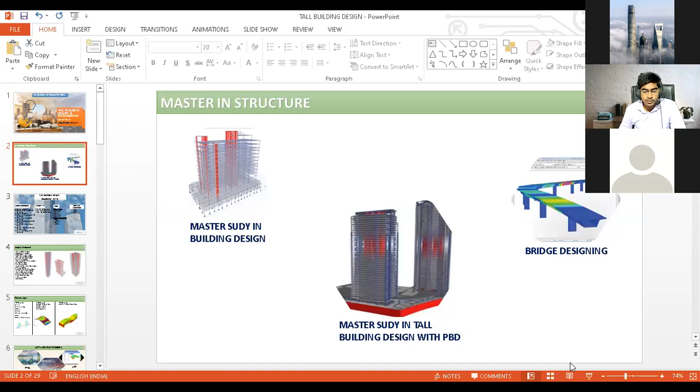Actually, we are running... But I told you that basic knowledge of structures is compulsory before learning tall building design. You have the basic knowledge of it, no? I think I have basic knowledge regarding structural designs. Okay, then it's okay, because it's a completely advanced concept we will talk about here. So you have to keep your basic knowledge beside all the advanced topics. I would like to explain all the advanced things here, and within 1 hour you will be up to the level where you at least know what tall building design is and how we can pursue the design.

So what is your comfortable language? Hindi or English or both? English. Actually, I don't understand Hindi. Okay, no problem. That is not an issue. I will explain completely in English only.

One thing: we are running master in structure courses, and we have three courses here: master study in building design, master study in tall building design, and bridge design. First, master study in building design covers up to G plus 10 structures only. All the analysis we perform there is up to G plus 10, not more than G plus 10. When you go above G plus 10, to G plus 30, G plus 40, we cover it in another course, tall building with PBD, performance-based design. And we have bridge design. These are the courses we are running.

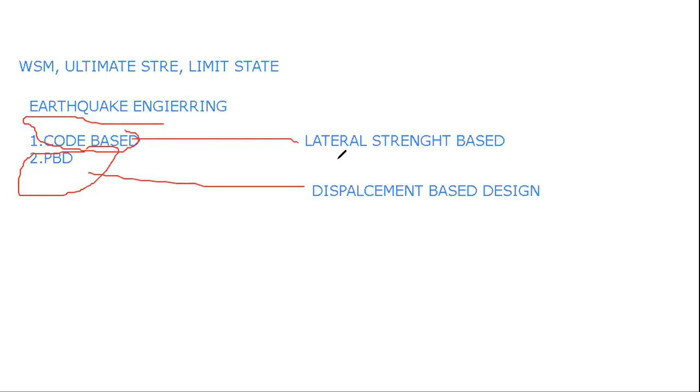But we have to understand what is the actual difference between code-based design and PBD-based design. This is the main difference. The lateral one we call a force-based design, and PBD is like a displacement-based design. So this is the actual difference between them.

Another thing we have to see is the force control. We have different types of elements. Suppose shear walls are there, beams are there, columns are there. So we have to categorize which elements will go more into non-linear behavior, we can say more inelastic. We have to see that.

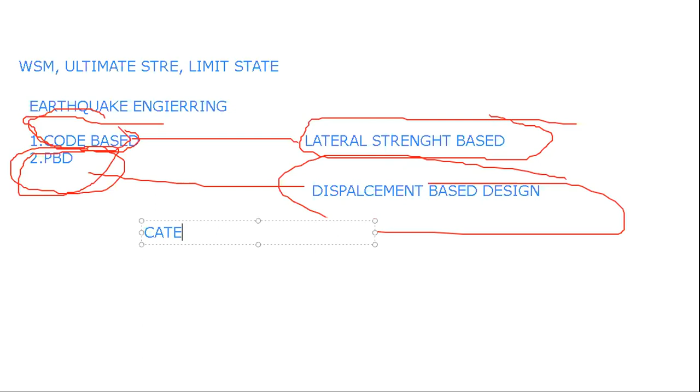We generally call it force control and deformation control. We have two categories. We have to categorize our elements into these two things, force-controlled or deformation-controlled. So why is there a need for categorizing?

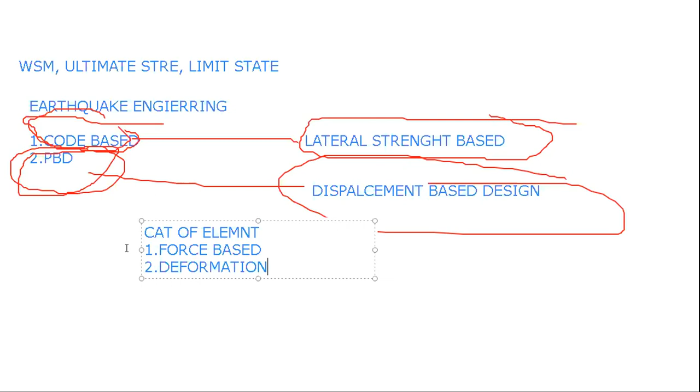We have to categorize for one reason only: some elements, like beams, will not go that much inelastic, but the shear wall will go more inelastic. So we have to make the shear wall more deformation-controlled. We will talk about it later when we go deep into PBD. So actually you have to understand it.

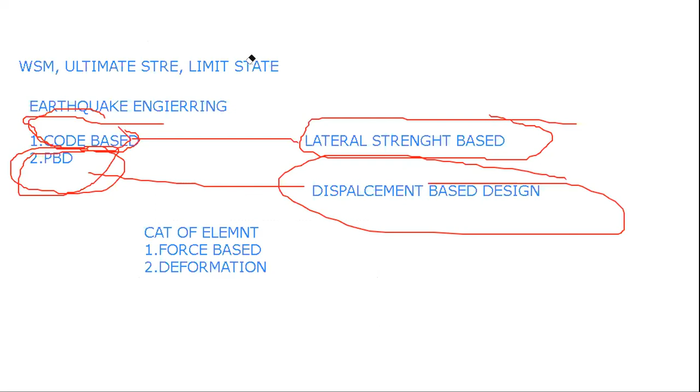The design evolution has been done: working stress, ultimate stress, and limit state. In earthquake design also there has been an evolution: code-based and PBD-based. In these complete demo classes, I will explain more about PBD in the upcoming slides.

Again, come back to our basics, that is, the courses. We have bridge designing here. Bridge designing we generally do in Midas Civil. It's completely a bridge design software, and all the analysis is done in Midas Civil.

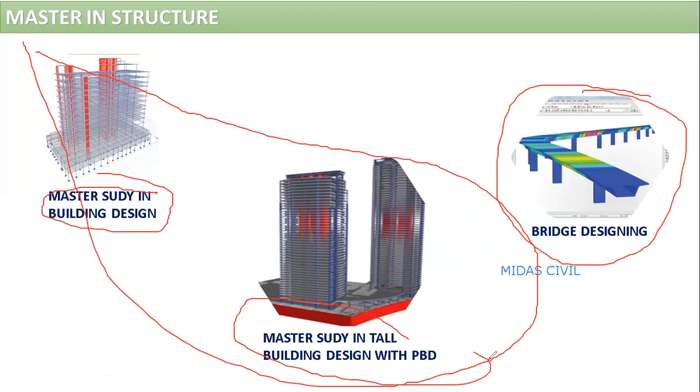In these demo classes I will talk about two things, only the building part: master study in building design and master study in tall building design. I will not cover any bridge designing. In this course, we will be highlighting the G+10 and the tall building.

Tall building also, because if you don't have any background knowledge, how can you learn tall building design? It's completely different. A G+10 building's behavior will be different. If you go above G+10, the building behavior is going to change. It's not going to be completely linear; we have to consider non-linear effects.

So only if you have the background knowledge of master study in building design, that is a simple G+10, can you proceed to tall building design. We also note in the courses that you should have at least a knowledge of G+10 structures to compare with tall building design.

Actually, I have knowledge about modeling in ETABS, reading the results and checking outputs regarding bending moments. That's the basic knowledge I have. Regarding manual calculations also, I have basic knowledge. Okay, no problem. But I will try to relate the two things, because I see you have experience also.

If you have 4-year experience in computer structure design, then I should start with tall building. But I told you I will cover two of them. Because I know that only output and results is not enough. If you see the coming slides, it is completely a next level of analysis. You will see. So I will cover both of things a little.

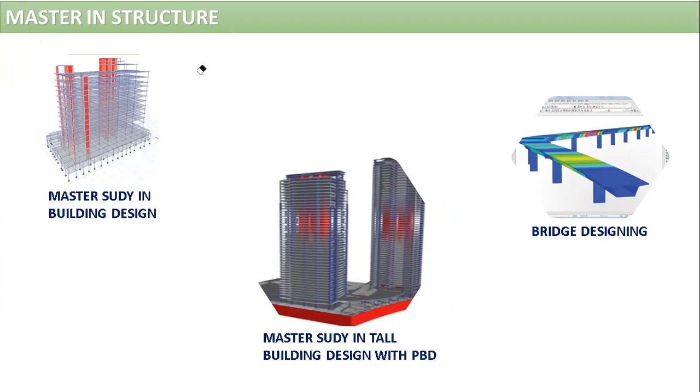So now we have to see the duration of the course of the tall building. Actually, the duration is 60 days, means 2 months. So in 2 months we are going to see all the parts here. You are going to completely study the design of the tall building, the structural dynamics of the tall building. Structural dynamics means you have complete knowledge of the dynamic behavior of the structures, means the modal behavior and all. It will come under this.

Structural system, you have the knowledge of the structural systems. Earthquake engineering. Wind engineering. So wind engineering also we are going to teach at an advanced level. That is the gust factor. You are going to study gust factor in this. Actually, we have different types here. I would like to show you.

See, wind engineering. In ETABS, we can apply wind through diaphragm extent, shell exposure, and through the gust factor. These three ways we have to apply the wind in the structures. The diaphragm extent is not that relevant, because if there is a tall building, gust application should be applied to that structure. So you're not going to study only the diaphragm extent and shell exposure. You're going to study the gust factor, and this very advanced level of analysis is there.

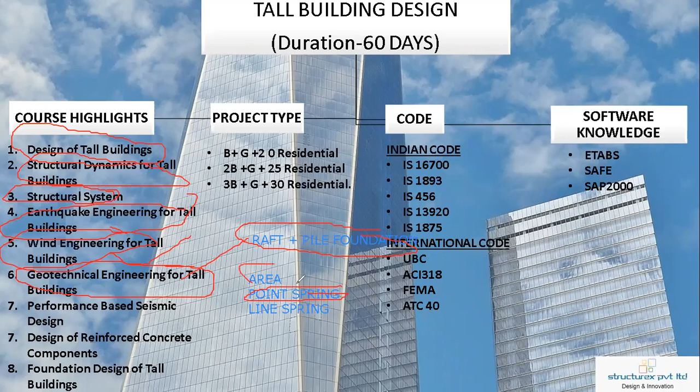But actually, in ETABS, we can't do design of foundation, right? I will come to that also. Area spring, line spring. There are different types of springs in the software. We can apply them through the stiffness properties. In the pile foundation we are going to study the point spring. If it is a pile plus raft, then area spring will also come. And suppose you have a pile foundation connected with a strap beam, then line spring is also included.

And we have performance based design, which I explained a little initially, and later on we will discuss it completely at an advanced level. Also design of concrete components, all the components here, the column, beam, shear wall, spandrel, and all will come here. And now we come to the foundation of the tall building design.

This foundation is done in the SAFE software. So here you are going to study the SAFE software also. A little bit I will discuss about SAFE software, what type of analysis you're going to perform in that.

Project type, you can see all the high rise structures you are going to do. 2 basement plus ground plus 25 floors residential project you are doing. Some people say only residential, why am I not doing commercial? So I cut one of the projects and give a commercial project here also. It is your choice, some prefer commercial, some prefer residential. Residential is compulsory, and there will be an option for you to have.

Okay, if we see the code, we have Indian code here. IS 16700 for tall buildings, earthquake code IS 1893, and ductile detailing code. All codes are there.

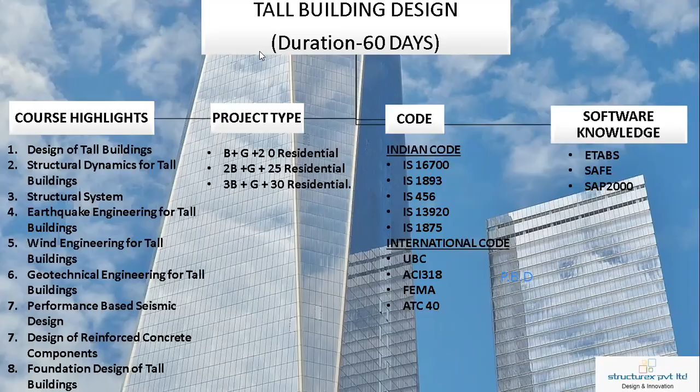So I will explain this is linear static analysis. Of course you will say, sir, you told me that you will teach only non-linear analysis. Not like that - linear static analysis is also needed. Data analysis, what you will do, is done in the linear only. So actually I will explain a little about the basic difference between linear analysis and non-linear analysis.

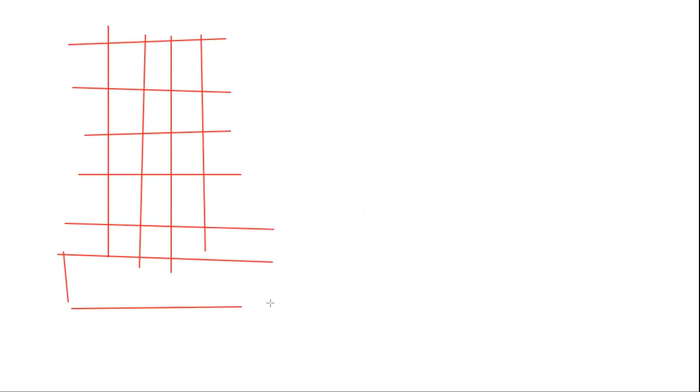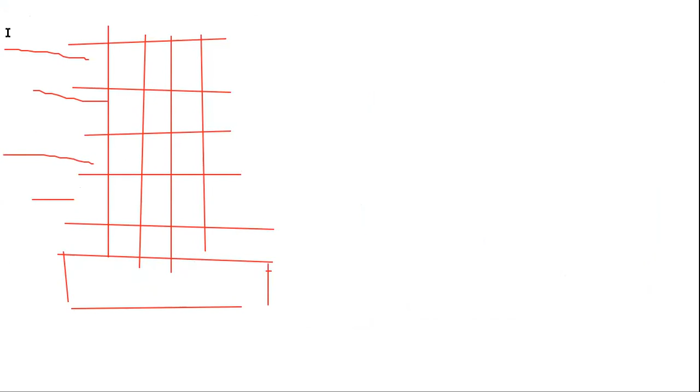See, suppose you have any structure here - assume it is like a structure, and what happened is it is raft. You applied any force here. So what happened - a structure has faced the forces and deformed. Yes, it is going to deform here.

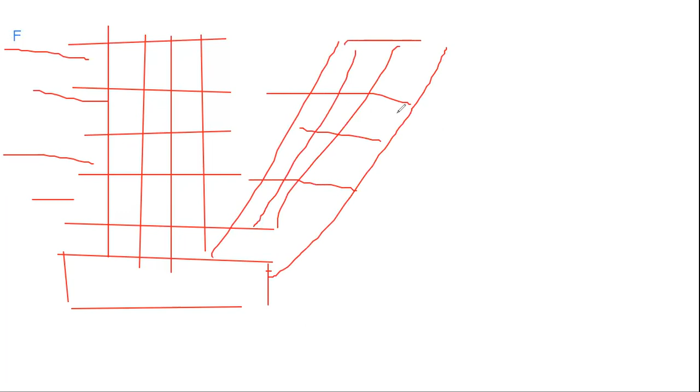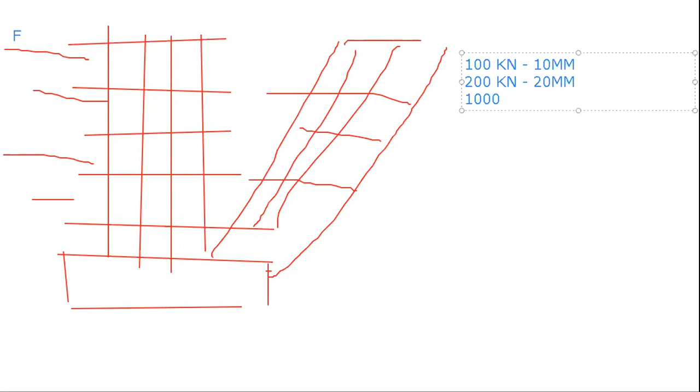Okay, it is going to have a deformation. Suppose we have applied 100 kilonewton of force, and I have a deflection of 10 mm. If you increase the forces, you get 200 kilonewton, a deflection of 20 mm. Increase to 1000 kilonewton and you get a deflection of 100 mm. So what is happening here is that you are getting a linear deformation.

You're getting a linear deformation. But what happens if you keep on increasing the forces? Suppose I have increased the forces to 2000 kilonewton, what will my structure have? The structure will get into inelastic positions. So what happens is that your software is going to show you the complete linear deformation there.

It is not going to show you that cracking is going to happen. Software is not going to show that. So if you do the linear analysis, it is completely linear. There is no cracking happening, and no non-linear property is going to exist in the system.

Is the curve you are showing a pushover curve? I am not coming to pushover yet, I am just explaining what linear analysis is here. What is linear analysis? Suppose up to this part, pushover curve will come later on.

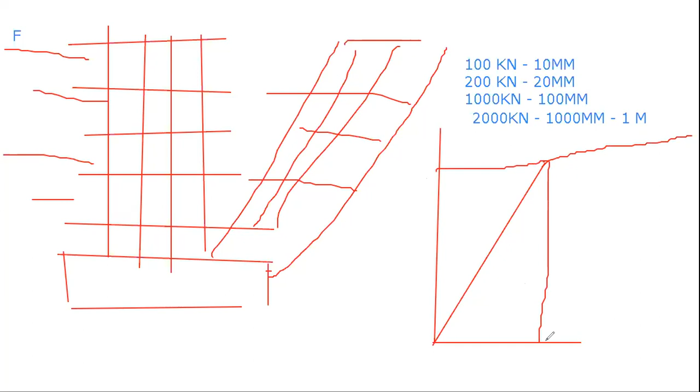Suppose you have applied forces to the structure and you got the deflection at this position. You keep on increasing the forces, and to the extent that you get 1 meter of deflection. Do you think 1 meter of deflection can happen in the structure? No, it is going to crack.

It is going to crack, but the software will not show that there is going to be a crack. It will show you linear behavior only until you do the non-linear analysis. If you don't include non-linear analysis, it will show only linear analysis. So what we need to do is introduce the non-linear material behavior.

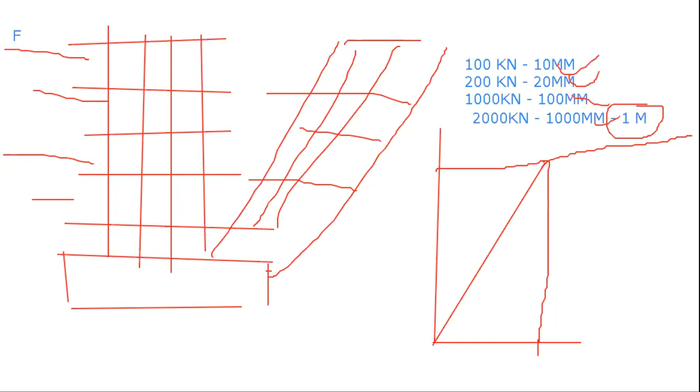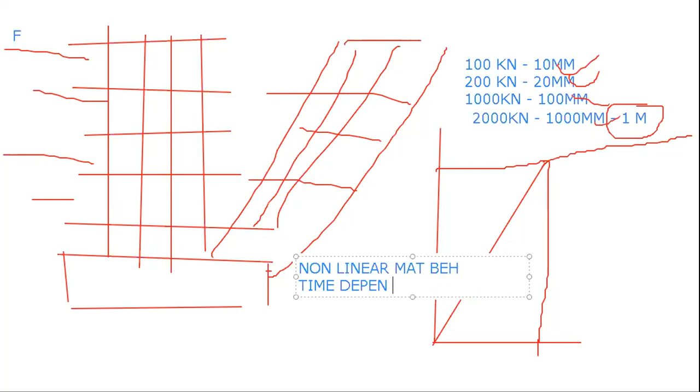And also we have to include a time dependent property, which we generally call creep and shrinkage property. Creep and shrinkage property should be modeled in the software, and we have to see what the creep coefficient is.

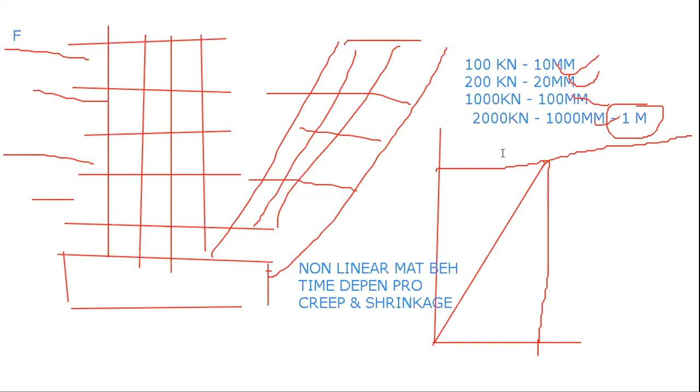But our code actually gives you only 1 year of creep coefficient, not more than that. But are you going to see only for 1 year? No, you're going to see for 30 years, 40 years. So this code will not help you. We have another code, the CEB code, that will help you.

We have a CEB code that will help you get the creep coefficient for 40 years and 50 years. That thing also we have to teach you. So non-linear behavior is very important in a tall building. If you see the backstay effect and such things come in, non-linear modeling should be done in that case.

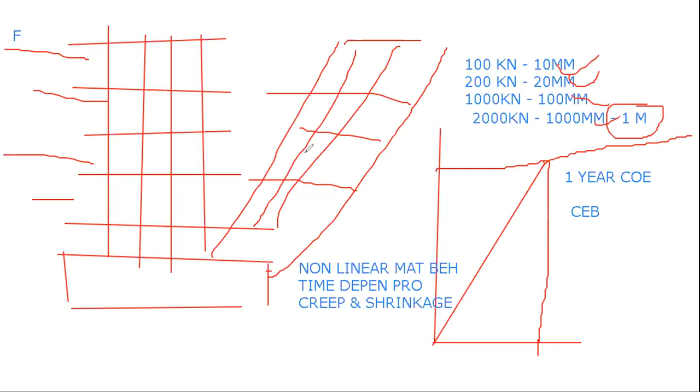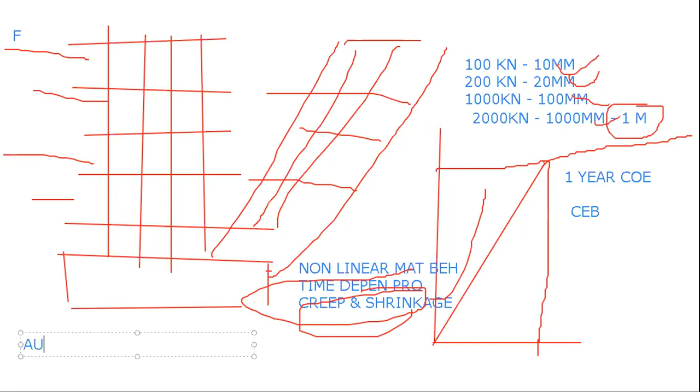And if shear reversals are there, we have to see all those things too. We have to understand the time dependent property, the shrinkage property, creep property, and how we can introduce material non-linear property in the design. And we have another analysis known as auto construction sequence analysis. I think you have heard this name also. I have seen this option in ETABS.

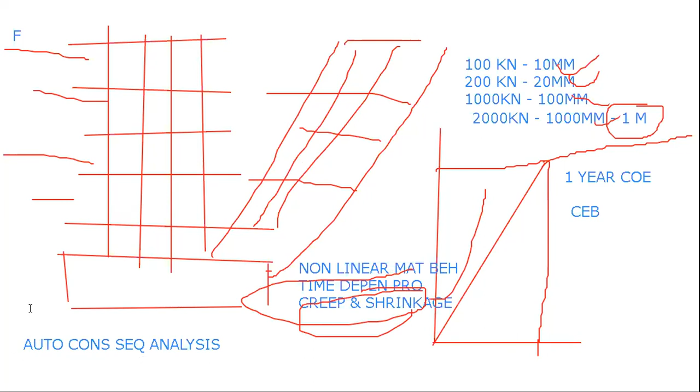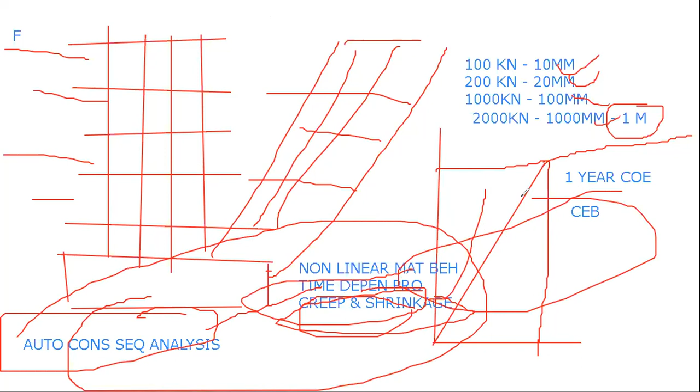Actually, this is a non-linear time dependent analysis. This auto construction sequence analysis we have to include along with time dependent property, and then we see the creep and shrinkage aspects. All the 3-4 things I told you are interrelated with each other, and with the code too. We have to see the nominal size of the aggregates and accordingly do things. So I think now you know what linear analysis is and what non-linear analysis is.

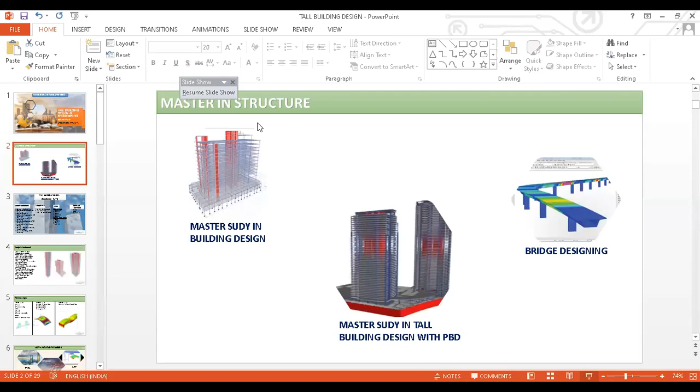So, in linear analysis, you're going to study the gravity load analysis, and here you're also going to study one important thing: control deflection.

So what is control deflection here? Let me write it short as control deflection. If you see IS 456, there's a clause on control deflection that our deflection should not exceed span by 350, or 20 mm. This we have to check.

Suppose we have applied a force to the slab and got the elastic deformation. I'm talking about elastic deformation. Assume you're getting 20 mm of elastic deformation.

But you know another deformation you have to consider is creep. If you see the creep, you will get a creep value too. To see the creep, you need to apply auto construction sequence analysis - you have to complete the auto construction sequence analysis. So to see the final deflection, we have to multiply with the creep coefficient.

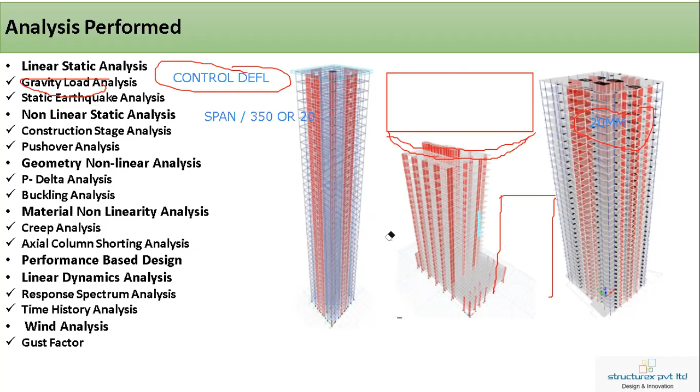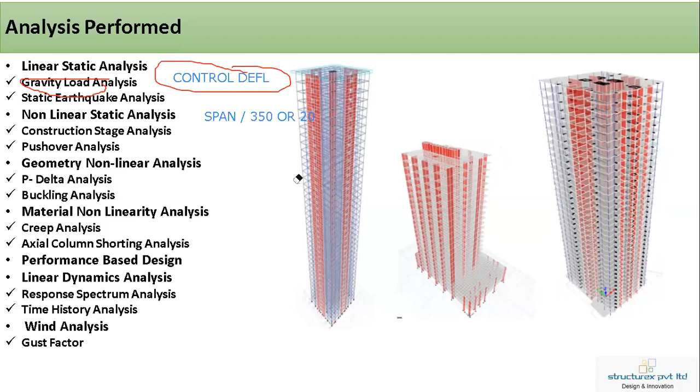So these are the technical things I've discussed here. This control deflection is also very hard to check - it's not straightforward. I told you it really depends - you have to see which span to consider, what length of span to consider, what load combinations to take. So all these things have to be considered too.

And the non-linear static analysis - that is construction stage analysis. I told you it depends on that. And we have pushover analysis - you're going to study pushover analysis for those cases. There's also geometrical nonlinear. There are two types of nonlinearity.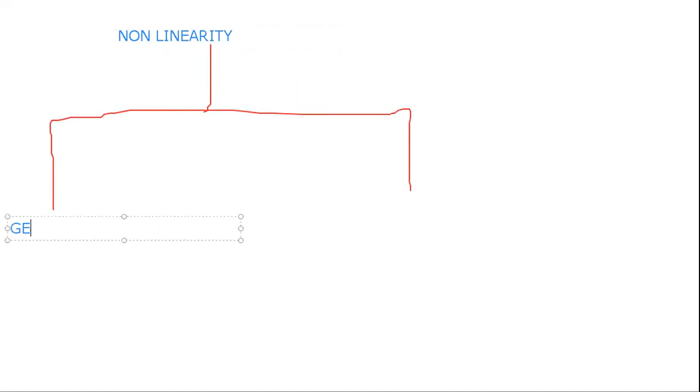I will explain. If you see nonlinearity, we have two types here: one is geometry nonlinear, and we have material nonlinear.

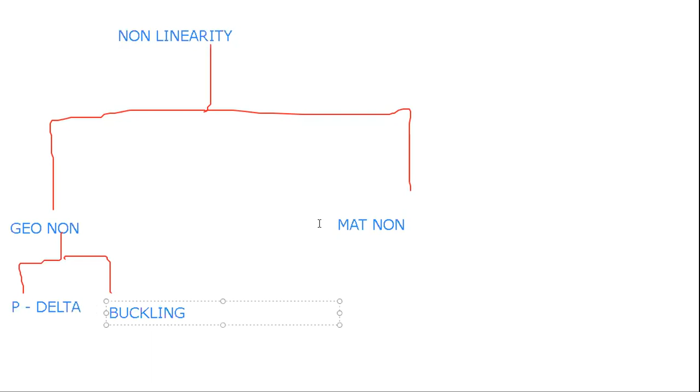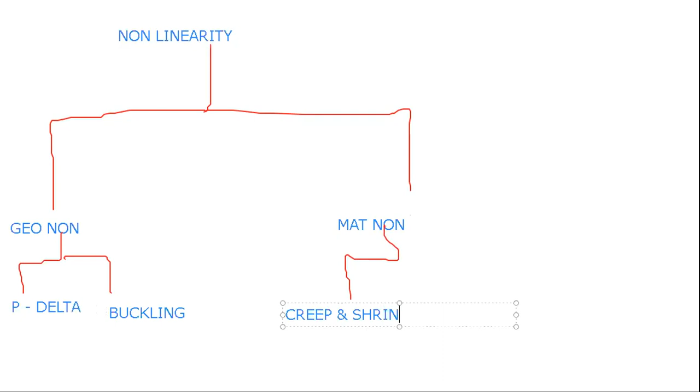In geometry nonlinearity, we again have two types: one is P-delta, and another is buckling. And in material nonlinearity, we have creep and shrinkage, and also auto construction sequence analysis. So with all these, we have to perform the analysis.

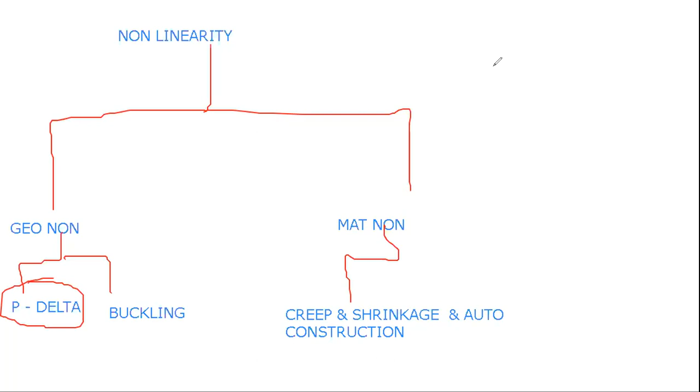Actually, I've mentioned P-delta analysis before too. So I would like to explain a little about P-delta, why it is very important and why it needs to be considered in the analysis. So actually what happens in a structure - if you see the structure, I'm modeling only the column, and I have restrained this, and applied a lateral force. Suppose this lateral force is V force.

Okay, and what is the height of it? If you see the height, we have a height H. And if you see the deflection here, we are having a deflection of delta. Assume it as delta. And the axial load will be up to this position. The axial load, that is P.

So if you see the initial moment, we generally get a moment here because we have restrained this. So there will be moment generation. So M is equal to V multiplied by H. So this is the primary moment. We call it a primary moment because this happens only when you run the first analysis.

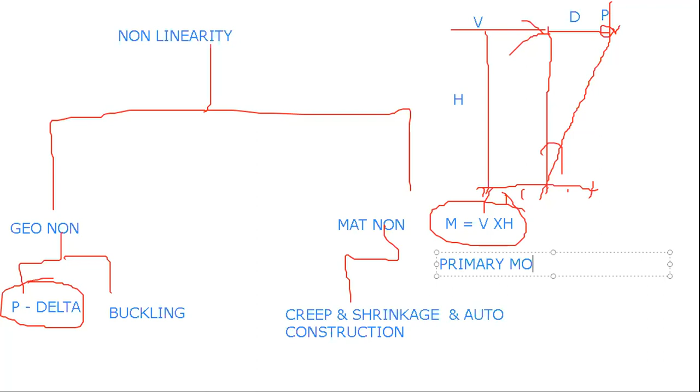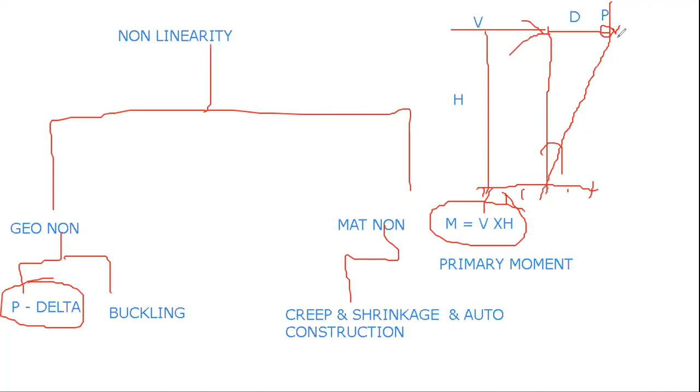But after you analyze it, there will be another analysis that considers the geometrical non-linearity. If you apply the forces here, this inclined column has a deformation because of the forces, and there will be two deltas here: a small deformation and a big deformation. We call it small delta and big delta. We generally ignore the small delta and take only the big delta.

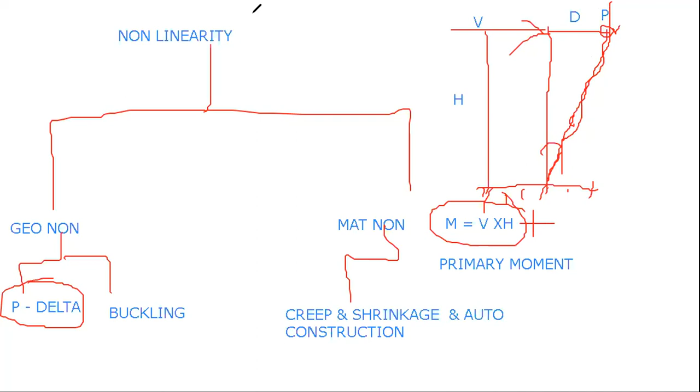So after one analysis, there will be another analysis, and we generally call it P multiplied by delta. It is generally called second order analysis, and this is also called the secondary moment. Because after the first moment, after the complete deformation from the lateral forces, another type of moment is generated because of the movement by delta. So we call it second order analysis.

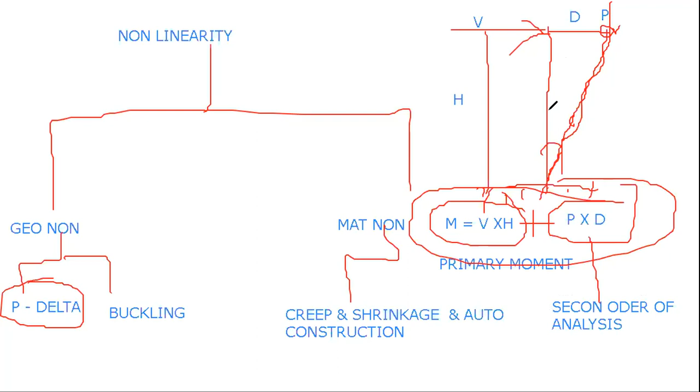And we have to notice here that we are considering the column stiffness and material nonlinearity also, because if you do not consider this, the curve you get is linear only. We need it to be non-linear. So that also we have to consider. The geometrical stiffness we have to take into account. But this is not only a small thing.

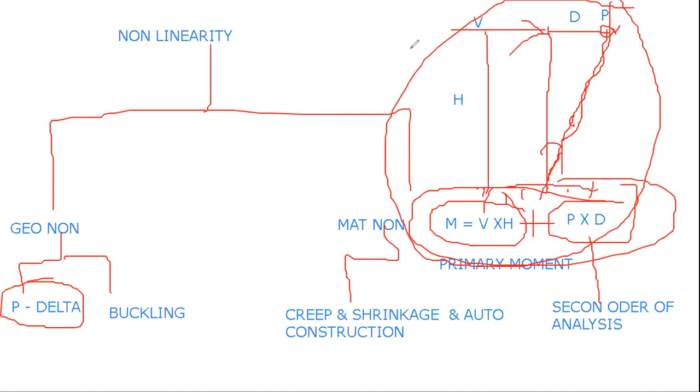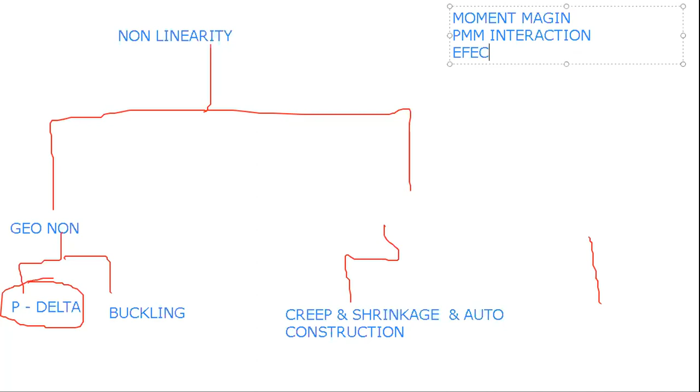This is not a small thing. P delta classes take more than three to four days, because in P delta we have to consider many more effects: moment magnifier, PMM interaction curve also comes here. We have to account for all these things for P delta. Without P delta also you can have a PMM interaction curve, effective length factor, slenderness problem.

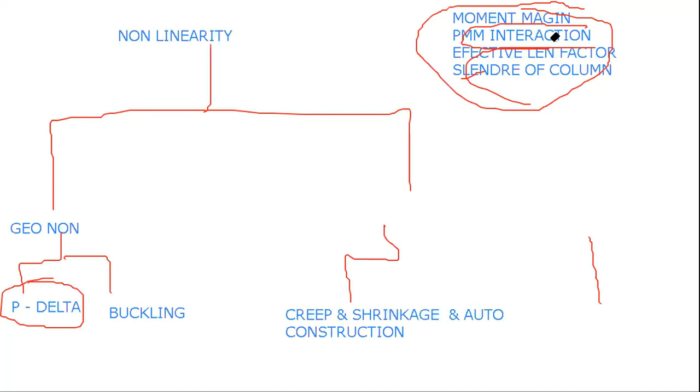But what we are going to learn is the effect of applying P delta on the PMM interaction curve, on the effective length factor of the columns, and on the slenderness of the columns. P delta is not like you apply it and it's done. Inside P delta, lots of analysis happens: geometrical nonlinearity analysis, material nonlinearity analysis, stiffness consideration. Lots of matrices are formed, so it becomes tough for the software too. The software takes half an hour to an hour to analyze only P delta.

And now we have buckling here. This is not the column buckling you understand; this is complete structure buckling. You have to calculate the buckling factor. If the buckling factor is near about one, then only you have to do the buckling analysis and consider the buckling loads in the structure. If it is not near one, there is no need to perform the buckling analysis.

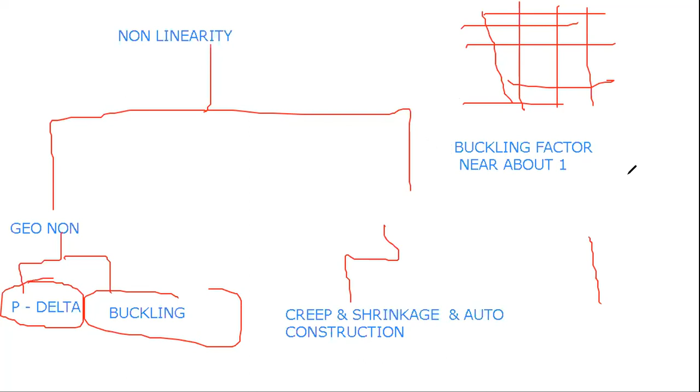So in most tall building structures, you have to perform this. In short structures, G plus 10 and so on, you do not need to perform the buckling analysis. But in tall buildings, it is performed. So I will take a few days on buckling analysis. P delta analysis and buckling analysis we generally cover in one week.

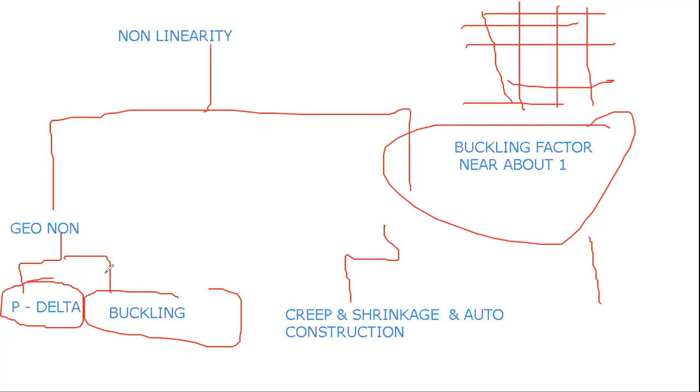And now we have creep analysis and so on. This is all material nonlinearity analysis, so you have to consider this too. I will explain the creep coefficient and so on; that comes under this only. Okay, so yeah.

So we have completed up to the material nonlinearity. Okay, sorry, buckling analysis. Material analysis, I have given you a little description about that. Okay, creep analysis also, and now we have axial column shortening. Actually, axial shortening in the tall structure is the main difficulty. What is the main difficulty in the tall structure? It is the axial column shortening.

Okay, so what actually happens in axial column shortening? See, some columns are going to be shortened more than others. We generally call it differential axial shortening. Because of that, a beam will not be straight there. There will be an inclination of the beam, and because of this inclination, a deformation will occur in the beam, and an extra moment is going to be generated in the beam. So to account for this, we have to do a separate type of analysis, that is axial column shortening analysis. Got it?

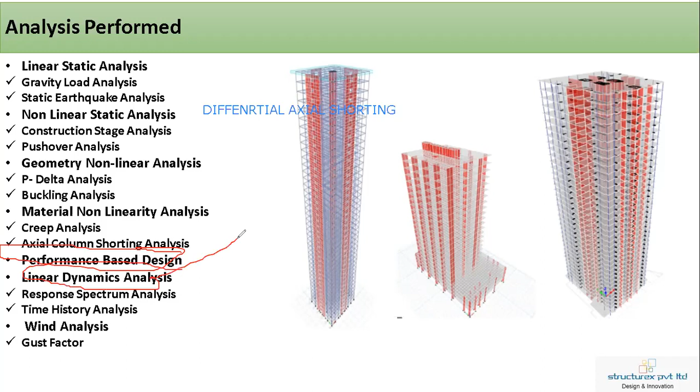Yeah, and for performance based design, we have to study linear dynamic analysis. Actually, in linear dynamic analysis, it is the response spectrum you are going to study here. Response spectrum analysis, complete. You are going to study it at the advanced level, not at a simple level, not only the code. Inside the code, what happens, and also how the curve has been generated. If you see the response spectrum curve, how the curve has been generated.

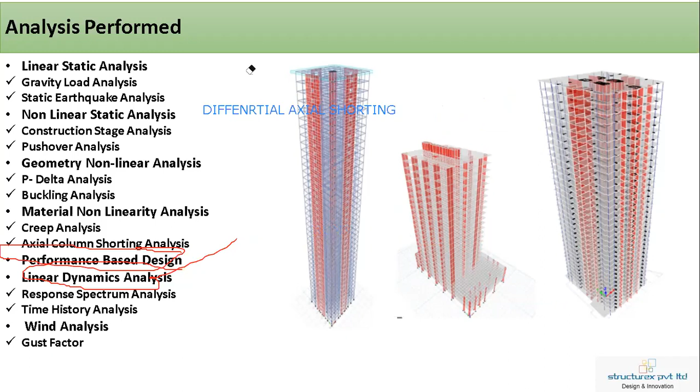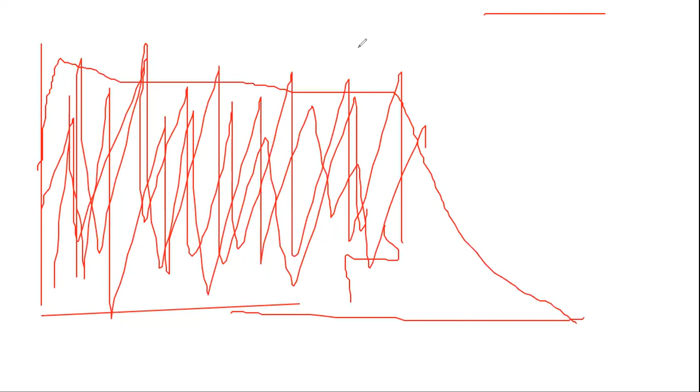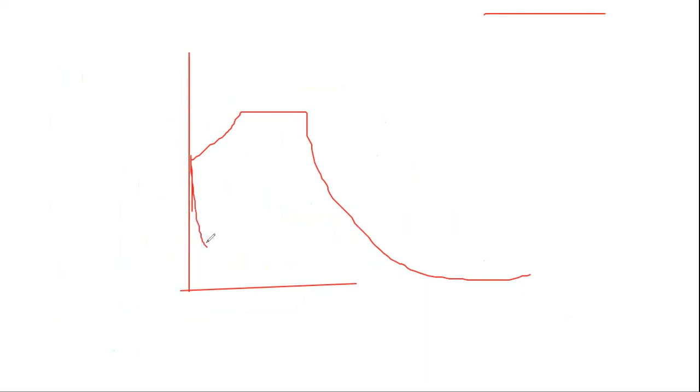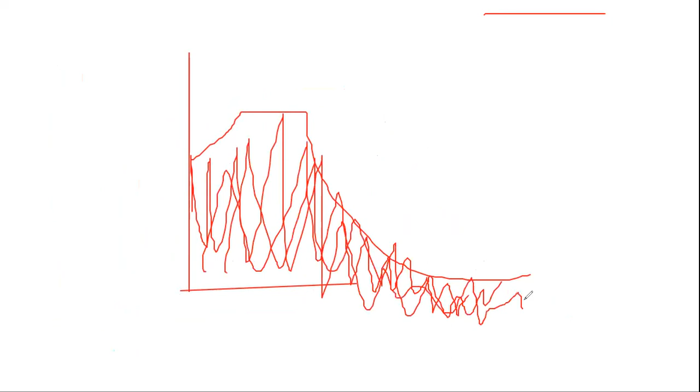Actually, what happens if you see the real ground motion? It will be something like that. If you see India, if you see Japan, it is something like that. But if you see the response spectrum, it is something like that. Why? It's between time period and spectral acceleration. Let me explain once again. If you see the response spectrum curve and the ground motion, you find that there is a blanket over it. The response spectrum is like a blanket.

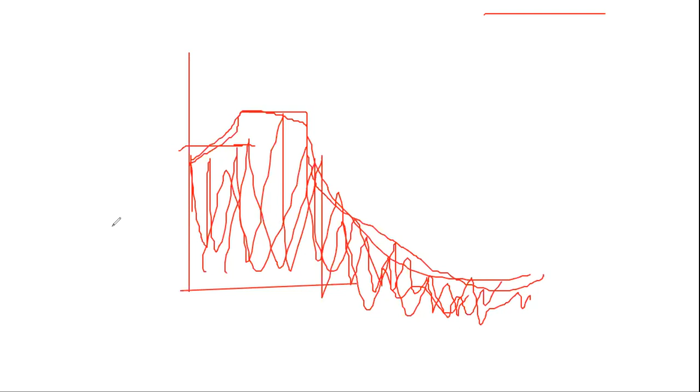So what happens if you have the ground motion? Yes, I got it. So the response spectrum is like a blanket. It is covering all the maximum responses of the earthquake. Actually, if you do sophisticated analysis and have not calculated the exact time period, your structure will experience different forces. So every code, not only the Indian code, has a response spectrum curve. Because if you consider different ground motions, it's not possible to cover all things. So we need a blanket that will cover all the maximum responses. We generally call it a blanket. So we have to cover these things also in the complete analysis.

And along with that, we have to see the time history analysis also. Yes, both we will see.

Time history and the response, because then only we will understand what is the difference of it. Time history we generally cover because of the PBD design. In PBD design there is a requirement of time history analysis. But we are going to import different ground motions there: maximum considered ground motion, design basis ground motion. So we have to consider different ground motions, and because of that we have to consider what is the maximum response of the structure with that ground motion.

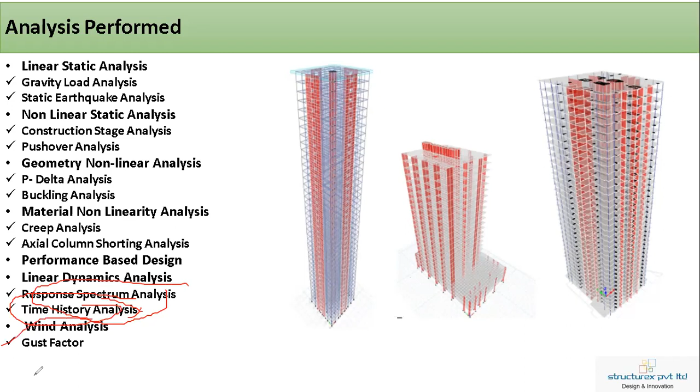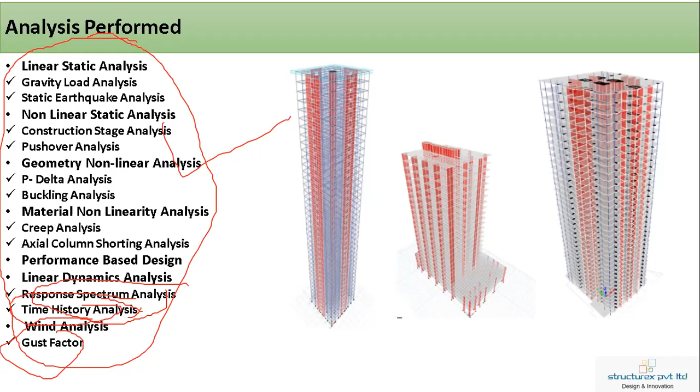We have wind analysis; I told you the gust factor we will cover. Along with this analysis, we are not going to cover only the analysis perspective. We have to see all the sequence also, which project we have to perform this type of analysis. So in the analysis we have to see many things. Torsion irregularity we have to study, in consideration of the Indian code and also the UBC. Both we have to see.

Stiffness modification factor, this also we are going to see. Torsion irregularity, stiffness modification, backstay effect. Multi-mode, along with this multi-mode we have to see. Shear reversal, this also we have to see. Soft story, mass irregularities, geometry irregularities. So there are lots of analyses you have to perform and see all the effects of it.

By performing this analysis you're going to see the torsion effect and like that. You can see this is the subdivided part of the analysis, in simple terms. If you see the soft story, how can we calculate the soft story? We have to apply the dynamic forces there, perform dynamic analysis, then only the soft story calculation will be there. Backstay effect also: we have to perform the dynamic analysis, and nonlinear analysis, to see the backstay effect. So these are the sub parts of it all. All these things we have to perform in this analysis.

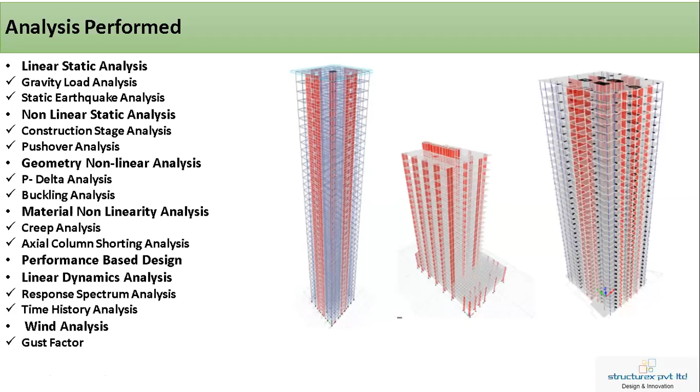Will you cover G plus 10 and basement plus G plus 20 both? No, actually I am talking here only about tall buildings. All the things I told you are a tall building concept only, because no one is going to apply the gust factor in a short building like G plus 10. No one is going to perform time history analysis in a small building. That's the reason I told you I will cover mostly the tall building. Okay, no problem.

Element types. This is the FEM concept, finite element. We have to understand the FEM concept also. We taught it in both tall building and short building, because some people do not know what the membrane concept is, what plate theory is, and so on. Frankly speaking, I also don't know that. That's why we have introduced this in the tall building course. You may have learned from consultancy or any other method, but we want you to learn the real thing. The software works on FEM, and if you don't have knowledge of FEM, how can you have judgment of it? That's why FEM is needed.

If you see the 1D element: in the real structure a column looks like 3D, with three dimensions, length, width, depth. But when modeling in the software, you're modeling only a 1D element, one dimension only. We generally call it Euler's beam theory.

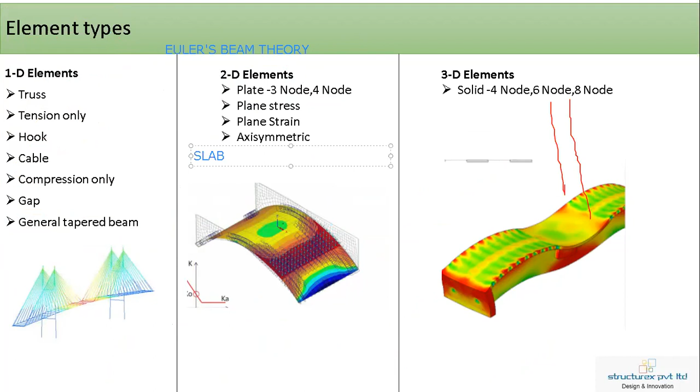But if you merge the two, we call it shell theory. The software can analyze both, plate theory and cylindrical. But STAAD Pro only has plate theory, no cylindrical theory. So in shell theory, what do we model? We model slab, shear wall, spandrel. These are all modeled with shell theory, as 2D elements.

And here we have to see all these things, I will explain that also. Membrane. What is a membrane? It does not carry any forces itself and completely transfers them through the beams. So we have to see the membrane. It's like one way or two way load distribution. I would like to explain what happened initially.

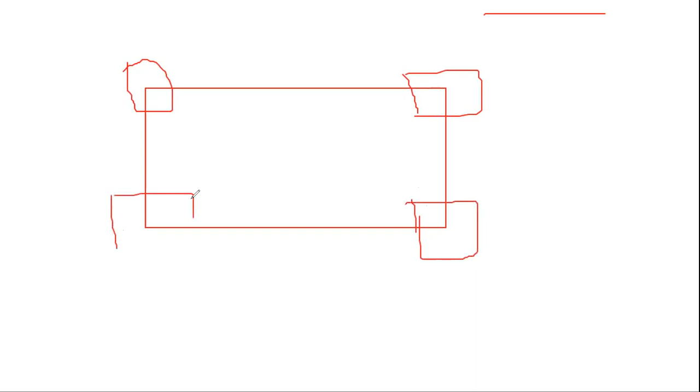When FEM was not at that level, structural engineers assumed, based on the placement of columns, one way or two way load distribution. This is geometry-wise distribution, based on geometry.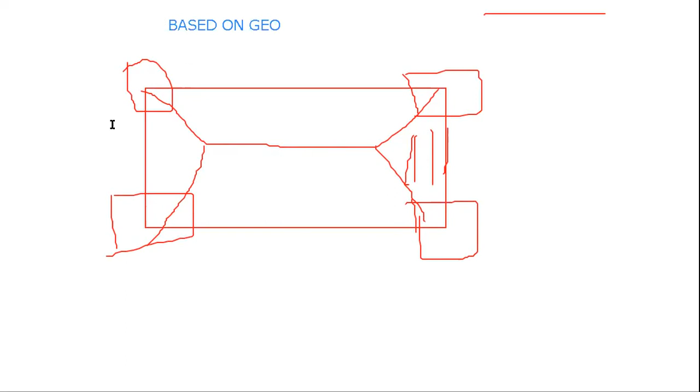But when FEM theory was at its peak, structural engineers said the load is not transferred by this method. Load is transferred by the stiffness method. In the stiffness method we have different theories, which I will come back to: thin shell, thick plate and thick shell. But first I have to discuss the membrane.

So what happens with a membrane? I've said this load is distributed to this beam, this load to this beam, this load to this beam. Then where does this part of the load go? There was no answer from structural engineers. So it is all backward theory.

The membrane is like the old version, geometry-based load transfer, because there was no deformation. It directly transferred all load to the beams; it was not going to deform and take the load. We call it in-plane stiffness. It had zero out-of-plane stiffness, only infinite in-plane stiffness.

But later on, we moved to advanced methods and introduced thin plate and thick shell. Within these, you have thick shell and thin shell, as we generally call them.

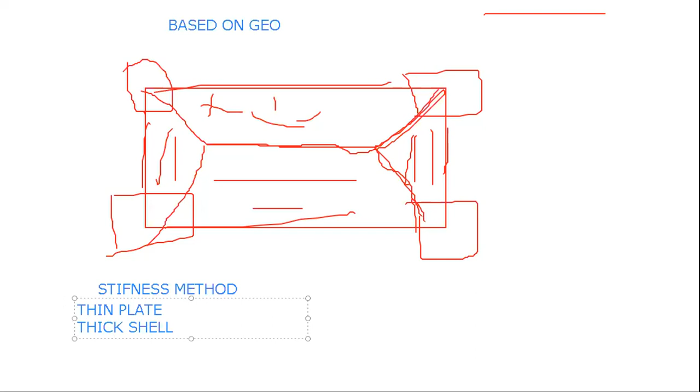I've written both things, that plate and shell are the same thing. I told you the shell theory comes under the plate theory and the cylindrical theory. So you understand that. So if you see the thin plate, the thin shell and thick shell, actually what happens in thin shell, it has out-of-plane stiffness along with in-plane stiffness.

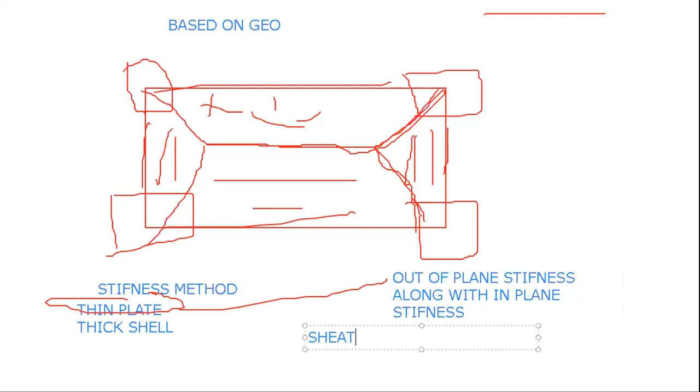So you will ask me, sir, why is there thick or thin? Actually, thick or thin has been introduced because of the shear deformation. Then you will say, sir, what is the shear deformation? If you have the basic knowledge, in bending theory, the first bending theory was that plane sections remain plane after bending. There we are not going to consider shear deformation. So if you model as a thick shell, the software will consider the shear deformation also.

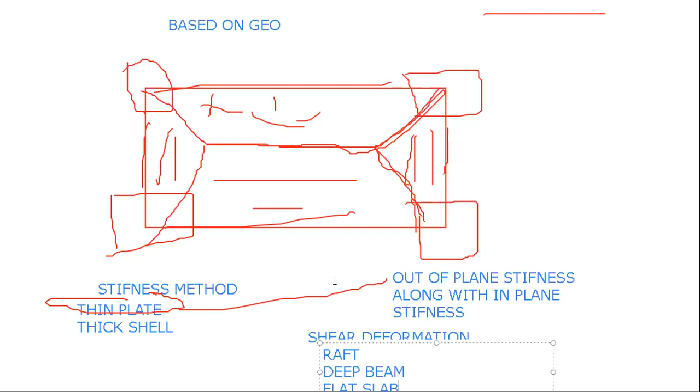So what are the elements where you model the shear deformation? See, raft, deep beam, flat slab. These elements have been modeled with shear deformation in mind, as thick shell. So you will ask, sir, what is the thin shell plate? The ordinary slab which you are modeling comes under the thin shell.

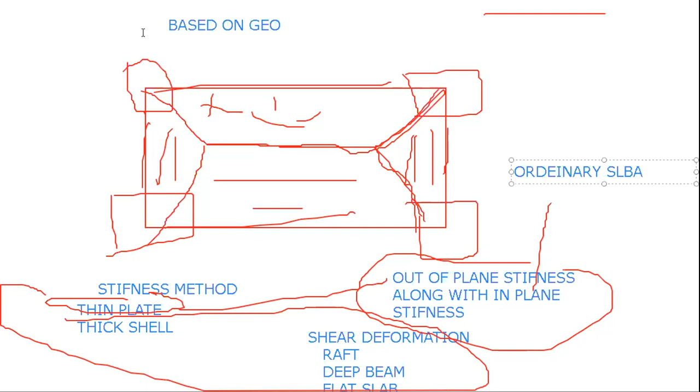So you will ask, sir, then what is the membrane used for? If you want to distribute the load one way or two way, then we use membrane, and generally we use it in staircases or ramps. It is a membrane theory. We have given a little knowledge here. If you go advanced, I will take the strut and tie method there, and I will bring the thick plate concept into the strut and tie method. That is an advanced level.

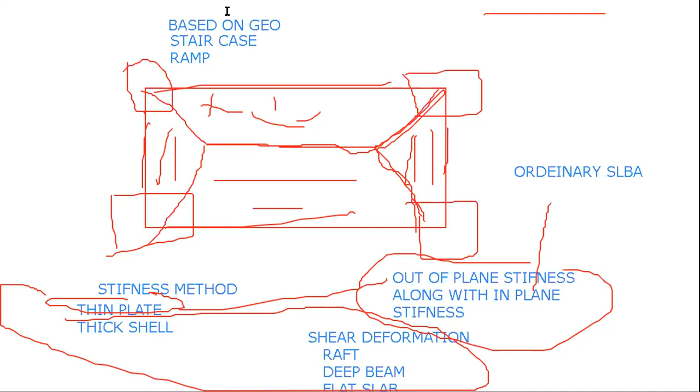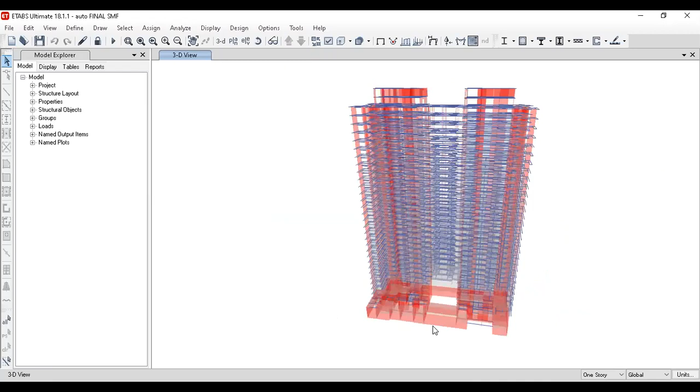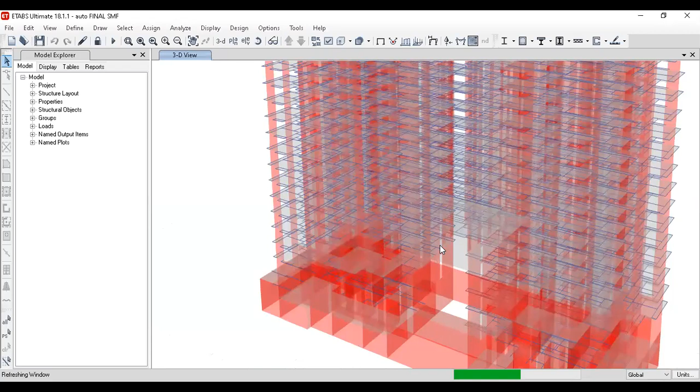So I would like to show something here. You're seeing this project? This is the project which I'm going to show. Actually, we have modeled it as thick shell there. Why have we modeled the thick shell? Because there was a deep slab for taking the load above. There was a floating shear wall there, and we have a deep beam, we can say deep slab here, that carries all the loads. So we have to take the direct stresses and shear deformation along this.

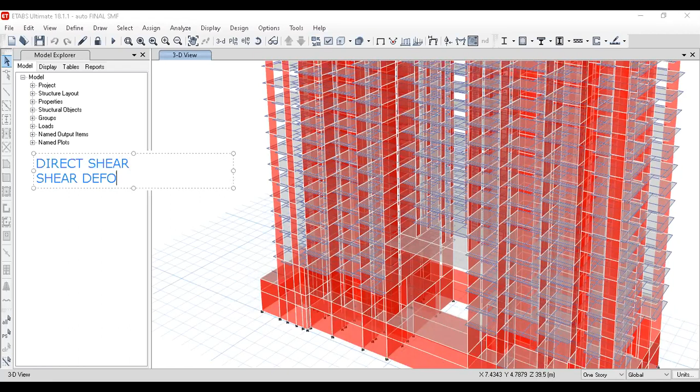Direct shear and shear deformation, we have to consider it. So that's why it becomes very important to model a thick shell there. So these are also things: when to model, and what to model when.

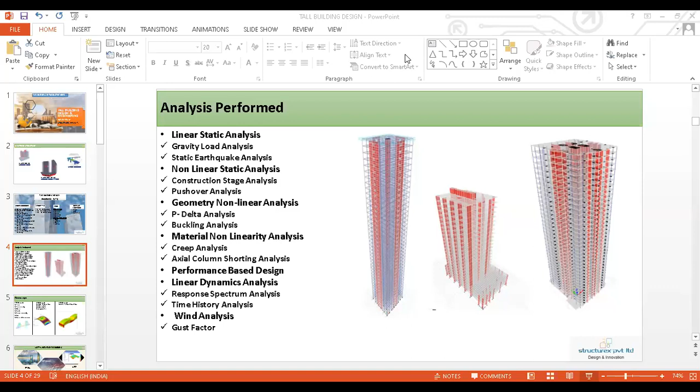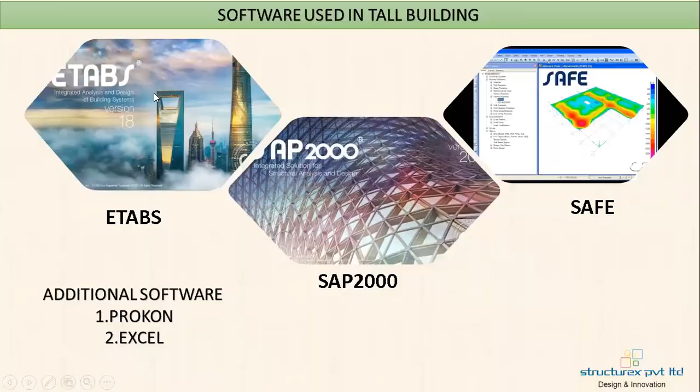But unfortunately, you cannot model this brick element in ETABS. You have to model it in SAP2000. This is a defect of it. Bridges and all require the 4 nodes, because a sophisticated and realistic type of analysis has to happen. So that's why in ETABS we only have a 2D element.

SAP is where you could do bridge design before, and also dams and all you can perform. Before, in SAP we had the bridge module, but they have made another software, CSI Bridge. But infrastructure projects can be done in SAP.

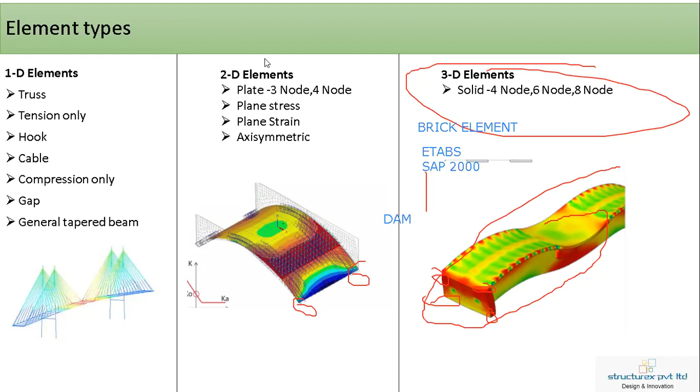Yeah, Aman sir came. Actually Aman sir, my PC has been stuck. Okay, so please carry on all the procedure. I have, uh, and you explain in the student section part how he works and the procedure of how we save the recorded video and all.